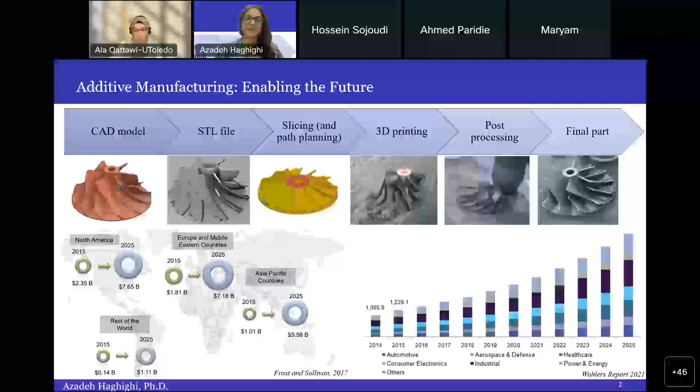Since its emergence in the 1980s, additive manufacturing was mainly used for making prototypes, and it has kind of been changing throughout the years. Especially recently, we have seen this trend that additive manufacturing technology and products are now being used in critical industries like aerospace and defense, and it is with no doubt that ensuring the final quality of these parts is becoming more serious than ever before.

No one wants a jet to drop out of the sky, right? So the technology, in a sense, is still not very mature. There are still issues with the quality of the parts that are being printed. For example, we see frequent voids and pores happening inside the specimens, and these are critical because these are generally the regions where cracks can initiate and propagate eventually.

We have surface roughness issues associated with parts printed with this technology, and then deformations and distortions which can impact the conformance of the parts to their tolerances. These are generally due to the cyclic patterns of heat—heating, cooling, and then shrinkage and expansion cycles that can eventually deform or distort the part.

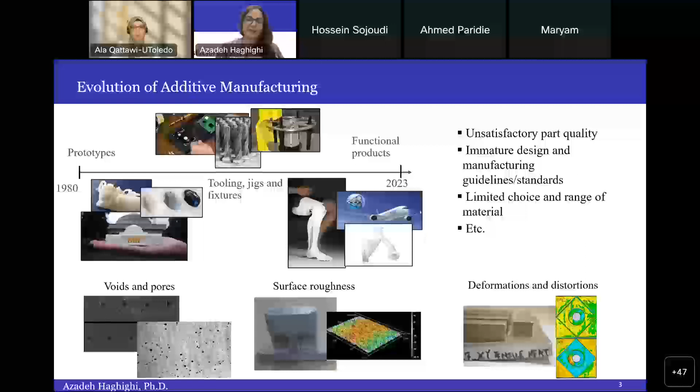So yes, there are a lot of issues, but from a researcher's point of view, this is exciting and good news. We have stuff to really work on to help promote and enhance the technology as it is. Throughout the years, my research group has been working on addressing different aspects of quality in additive manufacturing, ranging from micro levels to macro levels, and from process level to product level.

Today in this talk, I have selected three specific topics ranging from process to product level that our group has worked on. One is on filament bonding and porosity variation modeling. The other is surface roughness modeling, and the third, on the product level, deals with tolerance design and process planning.

As you see, these three topics match the three different quality issues that I mentioned with respect to additive manufacturing. After I talk about these works that we have done, I want to paint the picture for you of what the vision for smart additive manufacturing is, where we're really going.

So when it comes to real-time quality assurance, what is the future of additive manufacturing, what are the challenges ahead, and how our research group is actually trying to address those challenges.

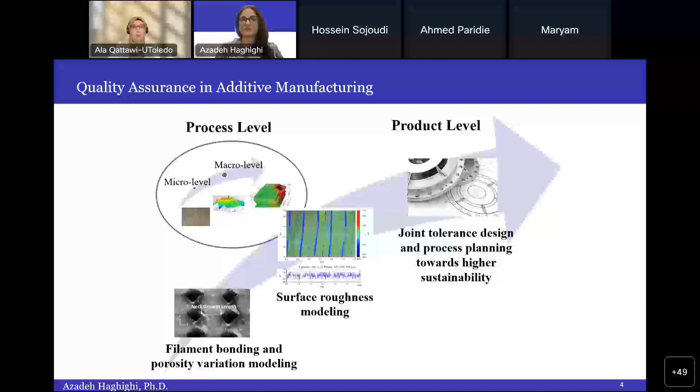With respect to filament bonding and porosity, these are really important factors because they can impact the mechanical properties of the parts. They are not generally desirable to have pores or voids inside the part. There is a lot of work to characterize the bonding and porosity, especially when it comes to extrusion-based additive manufacturing, and also the bonding of layers. Formulating this bonding and porosity is important to understand not only the global properties of parts, like tensile strength, but also the localized properties of parts.

By bonding, I mean basically the extent of two paths being connected to each other. In extrusion-based additive manufacturing, you have two paths being deposited. If they're close enough, they can start forming a bond, which is thermally induced and also induced by surface tension. The bonding specifies how strong the properties would be, but the pores also contribute to the mechanical properties. So understanding the spatial variation of both the bonding extent and the void is important.

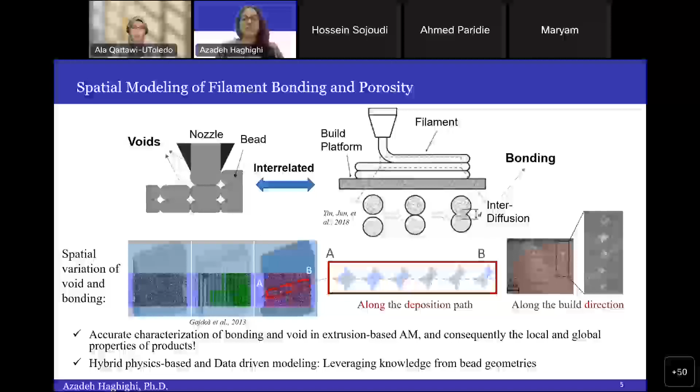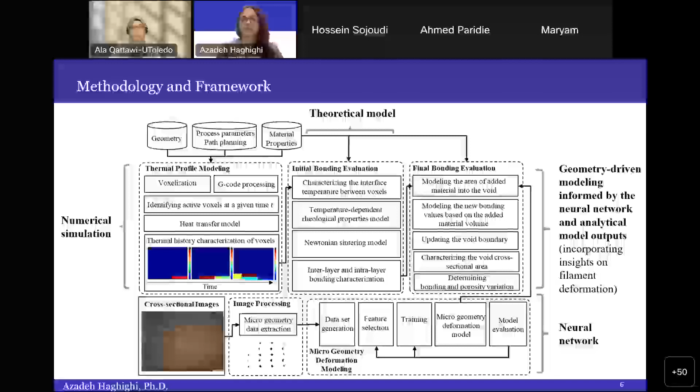However, we decided to look at the cross-sectional images of the printed specimens and extract data related to the microgeometry, to establish a relationship of the prints with the bead geometry deformation, and incorporate that information into the bonding formula from the Newtonian sintering model. Using the law of conservation of mass, we could update the boundaries for the voids and bondings, and come up with a more accurate representation of the spatial variation of these two elements.

This shows a bit more detail of the different steps involved in the methodology. Up to here, it's pretty much standard from the literature. We had this numerical thermal profile, actively updating a temperature, or thermal tensor using MATLAB, actively checking the active neighbors and contact areas to update the temperature. That temperature was then fed into the theoretical model to formulate the bonding.

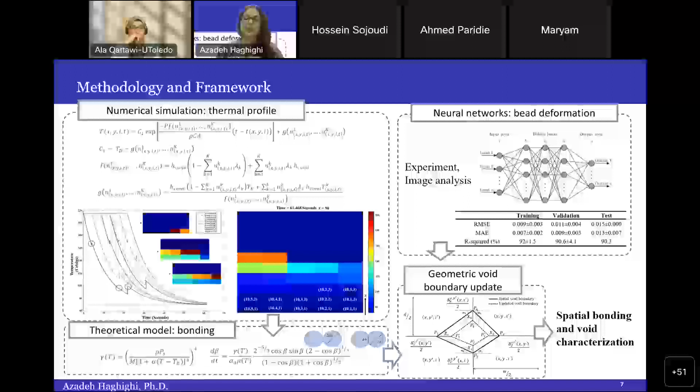And then we had a neural network formulating the bead geometry deformation, and finally a geometric model for the void boundary update, which gave us the updated values for the bonding and void areas.

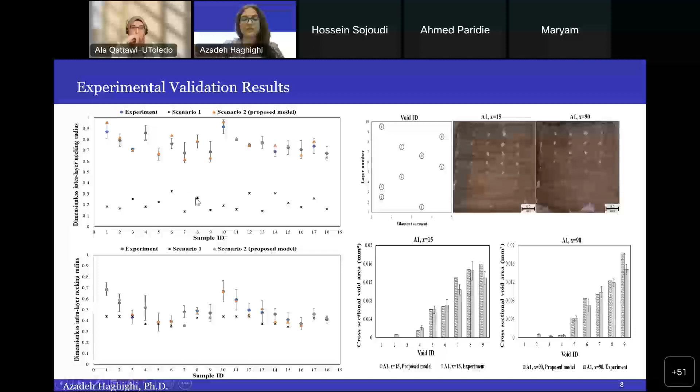This shows the results of this work. We had to compare with experiments, so here the orange ones are our predictions. On the left we have both the dimensionless interlayer and intralayer necking radiuses, representing not just the bonding with adjacent filaments on the same layer, but with the layers on top or the bottom as well.

The blue one is the experiment data, and you can see that the orange one, the proposed method, is very close to the experiment. The black one, scenario one, is the output of the Newtonian sintering model. This is if we didn't incorporate the bead deformation, and you see that we couldn't really capture the actual spatial variation correctly. By incorporating the bead geometry, we could enhance the prediction significantly.

On the right side, this was the necking radius, and here you can see some of our validation results with respect to the void area. We randomly selected some voids, using image analysis to get the area, and then compared it with our proposed model on the bottom. There was pretty much a good match between the two.

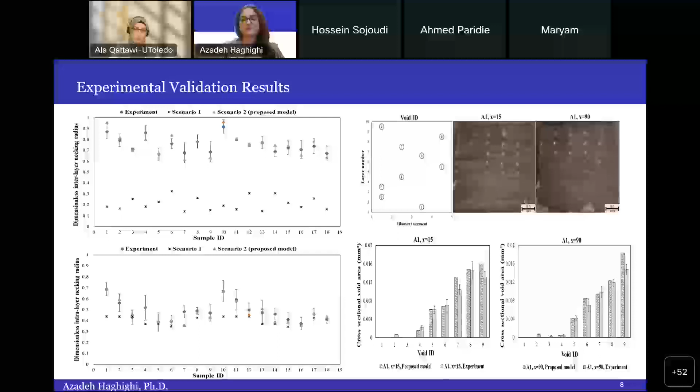So this was on the bonding and pore characterization. Now moving on to surface roughness characterization, we know that surface roughness is an issue in additive manufacturing, and many people use hybrid processes, for example incorporating additive and subtractive like milling together to enhance the surface roughness, and this is a very powerful tool.

One thing that was not really available at the time was any kind of theoretical model for the surface roughness as a result of a hybrid process. This is important because we want to understand the capability of our process, and see how much we can enhance the surface roughness using this hybrid process, and how much CNC milling processing would be enough to achieve the roughness we eventually want. So to address this gap, we came up with this theoretical model for surface roughness modeling.

Similar to the previous study, we wanted to leverage some insights from the actual physics of the process. In the previous one, based on domain knowledge of the process, we knew the bead deformation contributes to this spatial variation, so we wanted to leverage that information.

The same idea here, we wanted to get insights from the process physics. We leveraged the knowledge we had on the staircase effect and how that would create different patterns of surface profiles for the print, as you can see on the middle image. When you have a printed surface, due to the staircase error you have these stairs, and those staircases are contributing to the surface roughness.

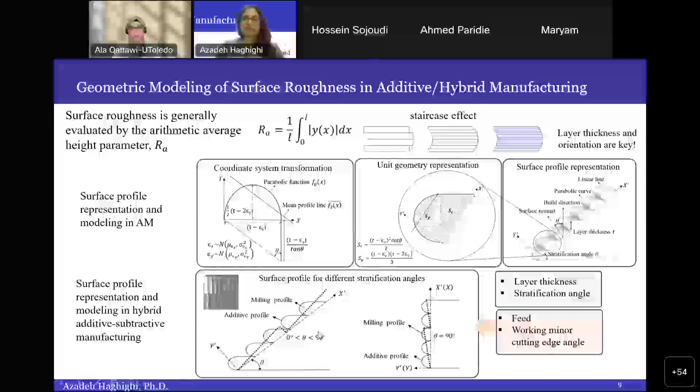Depending on different stratification angles, we had to consider different cases for the mathematical computation. For when the stratification angle was equal to 90 degrees, the bold thick line represents the intersected profile, the function we want to find eventually. Finding this profile can be reduced to finding these intersection points. If you know these intersection points that I've highlighted, you would easily get the function of this intersected profile, because it goes back and forth between the parabolic function and the sawtooth function. That was the problem we were eventually interested in.

Each of these functions we had to convert to periodic functions, so we used Fourier transform to do that, and then eventually intersect them, getting these intersected points solved using an algorithm that we developed. Eventually after that, it was all solved, and we could easily get the surface roughness solved. I don't have the formula here because it was a long one, but you could easily solve it afterwards.

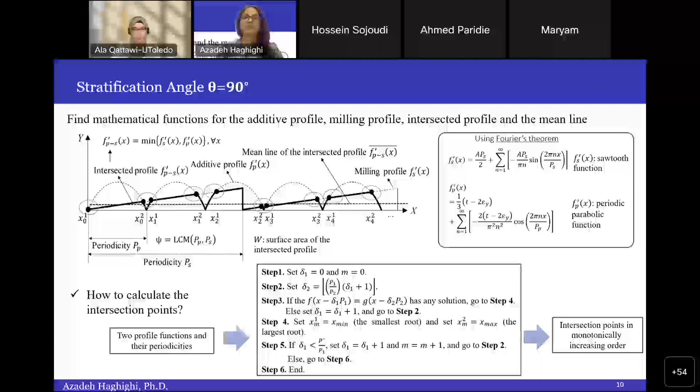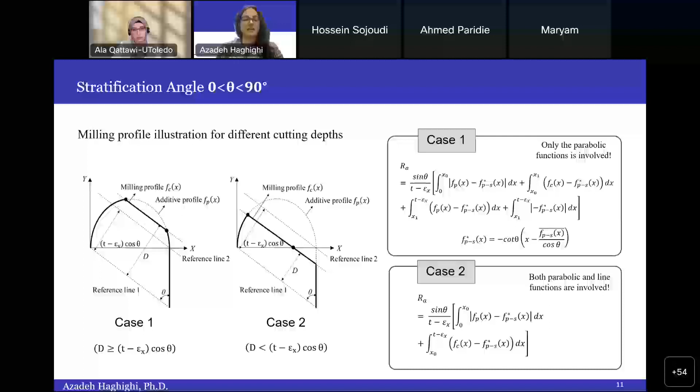For when the stratification angle was between 0 and 90, again we had to split it into two different cases depending on where the milling profile was positioned. If it was here or here, the formulation was slightly different. But the whole idea was still the same: intersecting them, finding the mathematical function of the intersected profile, and getting the surface roughness solved.

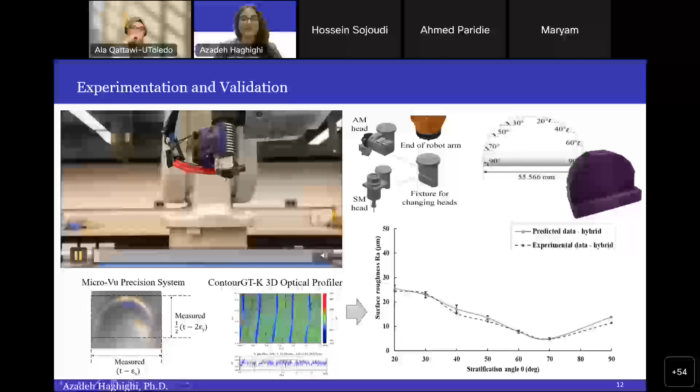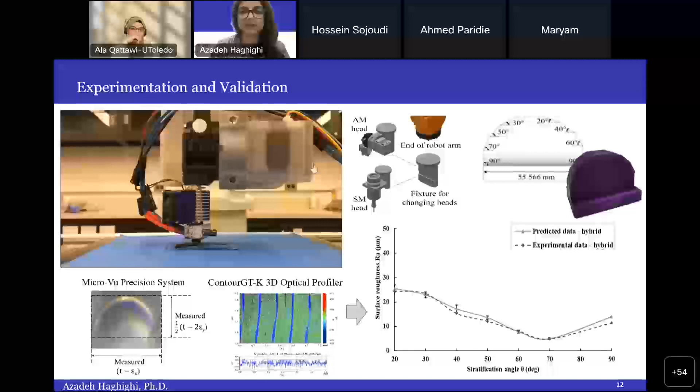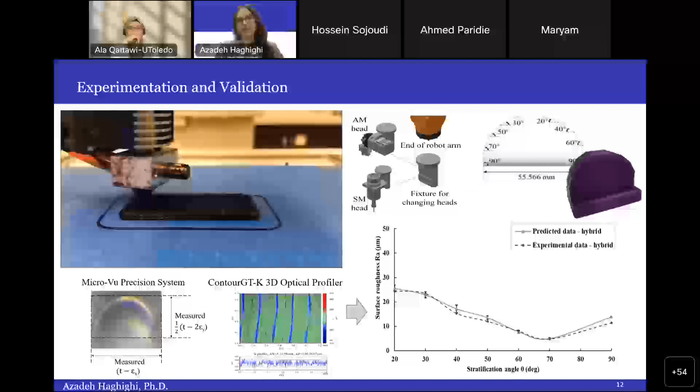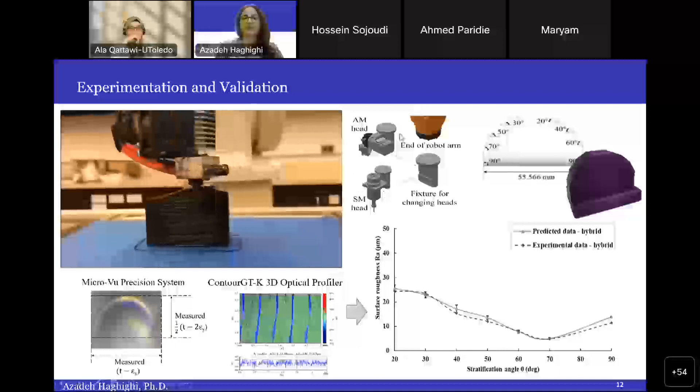So I'll jump to the results quickly. We didn't have a hybrid machine, so we actually developed our own robotic arm for additive-subtractive manufacturing. It required some coding - we had our own MATLAB code and some coordinate transformation to convert the geometries and the G-code from the slicer to the robot coordinate system. The robot was equipped with a subtractive head and an additive manufacturing head that we also developed.

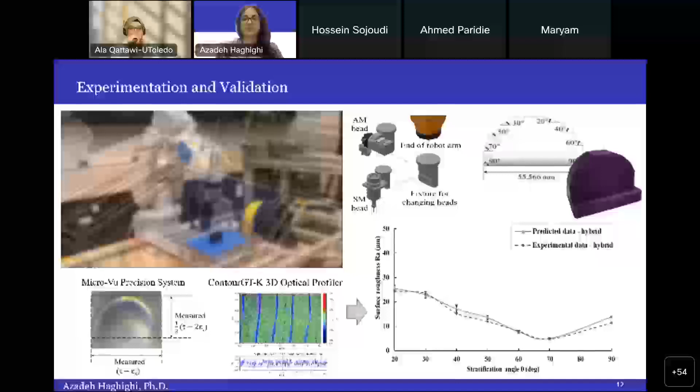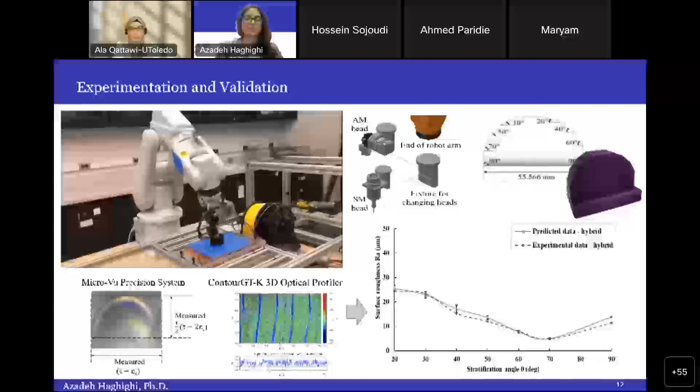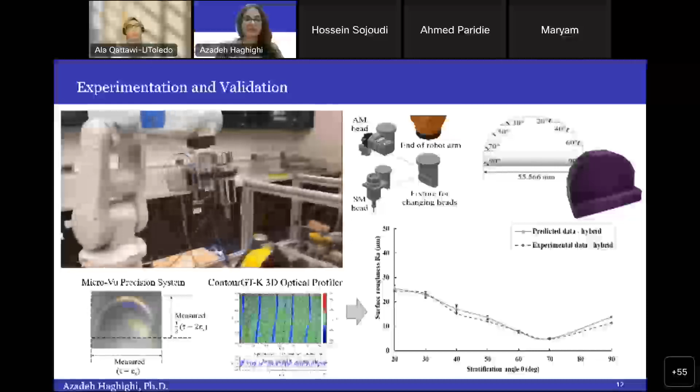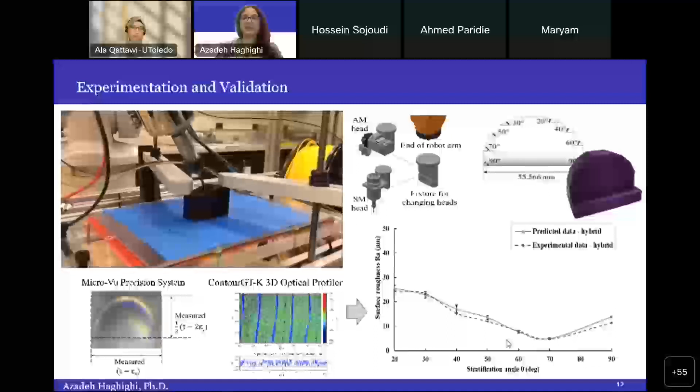We had this geometry that we designed with a range of stratification angles so we could test and validate the accuracy of our proposed approach. Some parameters in our model had to be experimentally fit because they were associated with errors of that specific machine or process - for example, epsilon X and Y, which we extracted from the actual prints under the microscope. We used the optical profiler to get the surface roughness out, and for different stratification angles, our theoretical model showed a close match with the experimental data.

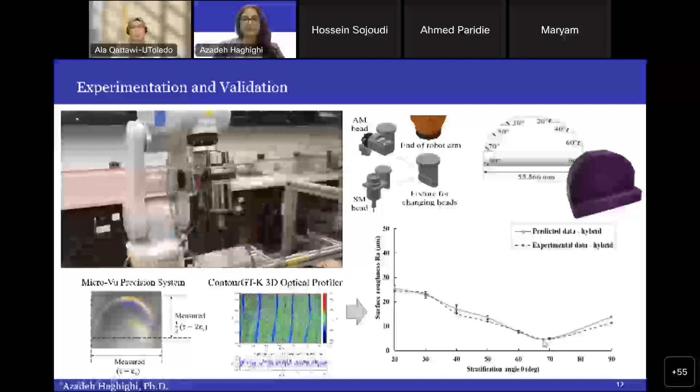So that's the robotic one. Now I want to jump to the product level. This paper, as well as the previous one, were both on the process level, and now I want to go to the product level.

Here we're dealing with different parts and a final product. Sometimes the parts have to be put together, assembled. And I know additive manufacturing has potential for making non-assemblies, but eventually in the real world there might still be some assemblies involved. For that, understanding the consequences at the product level is important, and what type of research can be done at that level.

Traditionally, tolerance design has been used as a powerful tool to minimize not just the defect rate but also the manufacturing cost. The way people traditionally do tolerance design is they come up with cost-tolerance functions that are experimentally fitted, and then use them at the design stage to come up with the right tolerances assigned to different parts. The whole point is to minimize the defect rate of the final part and ensure the final product has the functionality it needs.

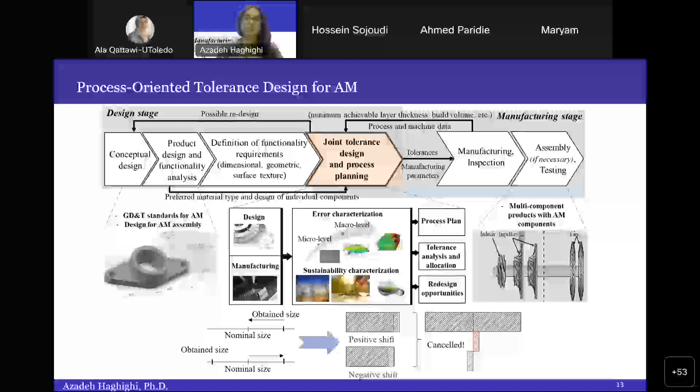In these traditional manufacturing studies, there are certain assumptions when it comes to tolerance design. For example, you need a good understanding of the probability distribution of the errors and variabilities associated with the process. This is something still not fully known for additive manufacturing.

In traditional manufacturing processes, generally based on the central limit theorem, one can assume normal distribution for the error. That's understandable because the scale of production there is mass production - you're fabricating hundreds or thousands of parts. So you can easily assume normality of errors and the calculations still look sound. But those assumptions are not valid for additive manufacturing anymore, because we're not dealing with mass production, we're dealing with mass customization. We're not interested in making thousands of parts, but maybe one, two, three, or a small batch of certain geometries before moving to another set. So it's clear that traditional tolerance design approaches might not be useful anymore, and their assumptions are not valid anymore.

So there should be some way to do tolerance design for additively manufactured parts with consideration of the new circumstances of additive manufacturing.

Traditionally, tolerance design is done separately at the design stage, and then the tolerances are transferred to the manufacturing stage, where the manufacturer decides what process parameters to use, for example just based on experience or some guidelines, to achieve that tolerance. For additive manufacturing, I don't think this is a good approach.

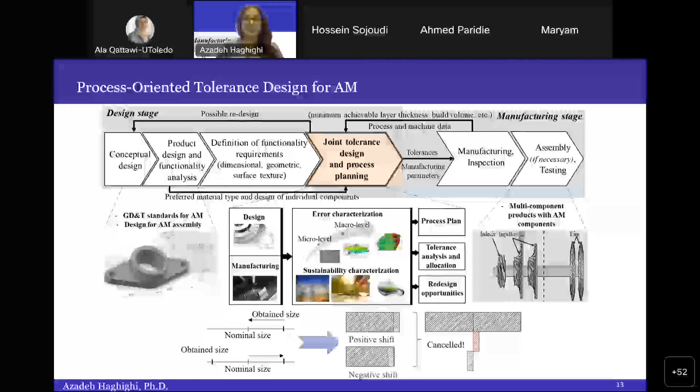And this is still cheaper than going with any type of compensation or other fixes. So it's cheaper, less effort, and we still get the assembly functionality we need. So why not do that? That was the inspiration.

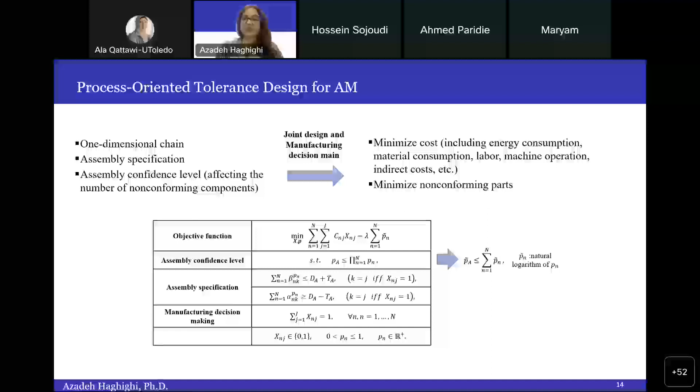So we formulated a one-dimensional assembly chain, the simplest case, starting with a given assembly specification and a required confidence level. The decision variables for us were this matrix X, the assignment matrix.

I want to decide which part should be built with which set of process parameters in additive manufacturing. We also had a vector P, reflecting the confidence level of the components, which was eventually translated into tolerances and the defect rate of the assembly. Then we formulated an optimization model with different constraints with respect to the assembly confidence level, assembly specification, and manufacturing decision making.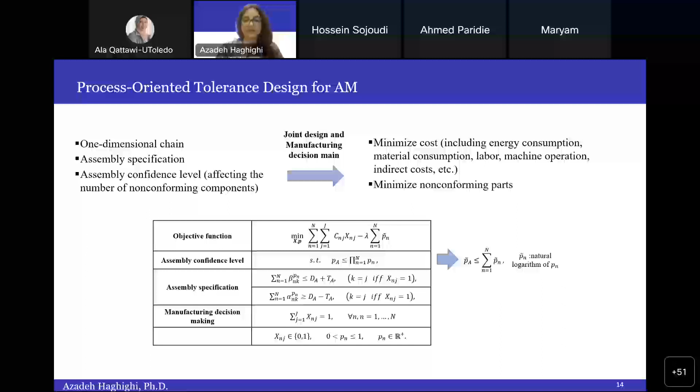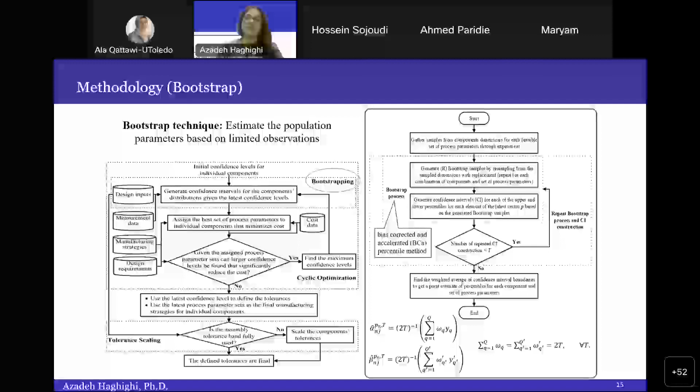We had some nonlinear constraints which we handled by converting them to linear constraints. The methodology we adopted for solving this: first we use bootstrapping, a statistical technique that, when you have limited observations, allows you to estimate population parameters based on those limited observations.

For additive manufacturing, we knew that if we wanted an idea of the error distribution, we couldn't simply assume a normal distribution. We had to estimate this based on limited observations, and that's why we used bootstrapping.

The bootstrapping technique was used to calculate the confidence intervals for each element of the vector P. We repeated that simulation T times and got the weighted arithmetic mean of those values to get the upper and lower bound for the confidence level, and we did that for all the different parts we had.

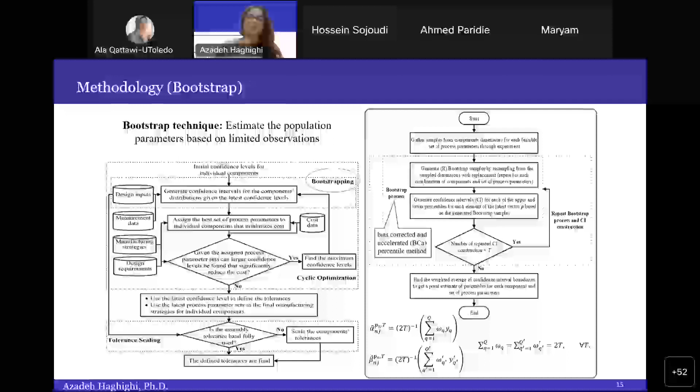We used cyclic optimization to solve the problem because it was a multivariate optimization problem. The way the objective function, constraints, and decision variables were related made it really hard to use any other optimization method, so this was the solution we came up with. In multivariate optimization, you fix one of the decision variables—here we had two decision variables.

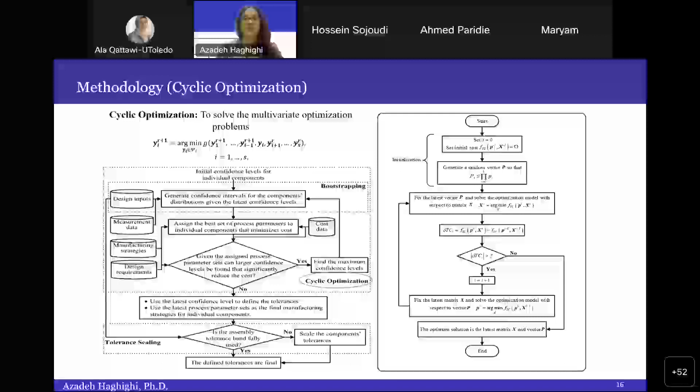So we fix one of them and solve the optimization with respect to the one remaining. Once you have a solution, you fix that one and again solve the optimization with respect to the other one, going back and forth in cycles to converge to the solution you want.

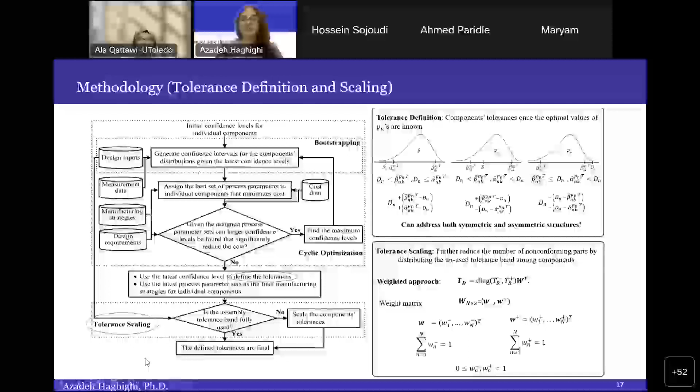The last step was tolerance scaling. We went back to see if there was any unused tolerance band, and if there was, we distributed it among the components to further reduce the number of defect rates at the end. We used a weighted approach to do the distribution.

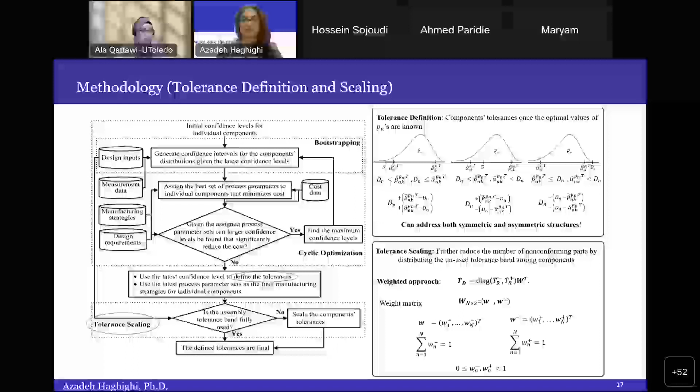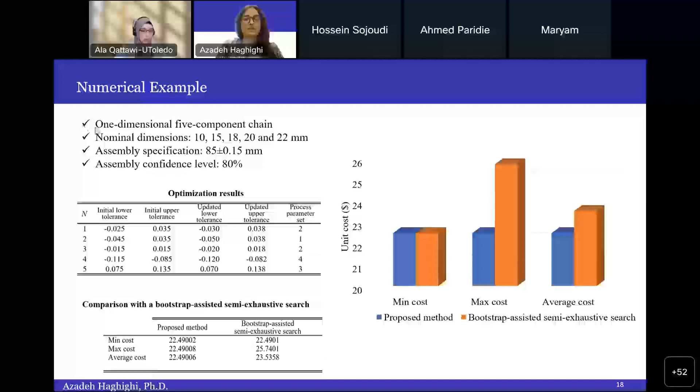This is a simple illustration of the results. As I said, we used a one-dimensional chain with 5 components, printing components with different nominal dimensions that were contributing to the chain of the assembly, and the assembly specification confidence level was given to us.

We used our methodology to find the tolerances for each component plus the additive manufacturing process parameters that should be used for each one individually, not just to achieve the lowest cost possible, but also to achieve the confidence level and assembly specification we wanted.

We even compared our method to a bootstrap-assisted semi-exhaustive search. The blue one here is our method and the orange one is the bootstrap-assisted semi-exhaustive search. You can see that the unit cost for the assembly with our approach—the minimum, max, average—is always consistent, whereas with the other one you need to do an exhaustive search and still couldn't really achieve that well.

In terms of computation cost, our method was still faster than the exhaustive search. This was the first step towards doing tolerance design with additive manufacturing using a smaller amount of data points, and also how to do tolerance design jointly with manufacturing decision making, rather than separately as was traditionally done.

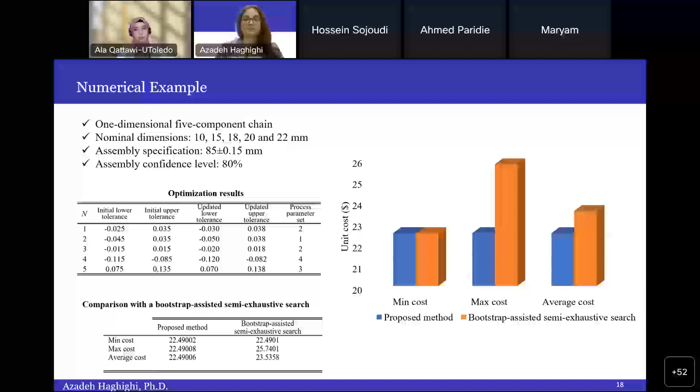All these methods I talked about had some components that were model-based and some that were data-driven. Model-based generally means you have optimization models, numerical models, anything that comes from domain knowledge or physics of the process, or a theory—we call it model-based. Model-based approaches are generally interpretable and reliable.

With respect to capturing stochastic behavior, model-based approaches are not as good as data-driven approaches—they're generally more on the deterministic side. Because of that, they generally give us lower accuracy, since you have to make a lot of simplifications and assumptions with model-based approaches.

Data-driven approaches, on the other hand, can do magic—especially with a good amount of data to fit them, they can get very accurate results. However, they have this reliance on large data sets, which is costly and complicated, especially for additive manufacturing, where data acquisition, gathering, and pre-processing are very time consuming and costly. Training data-driven approaches is also costly, and eventually you end up with a black box that's hard to interpret.

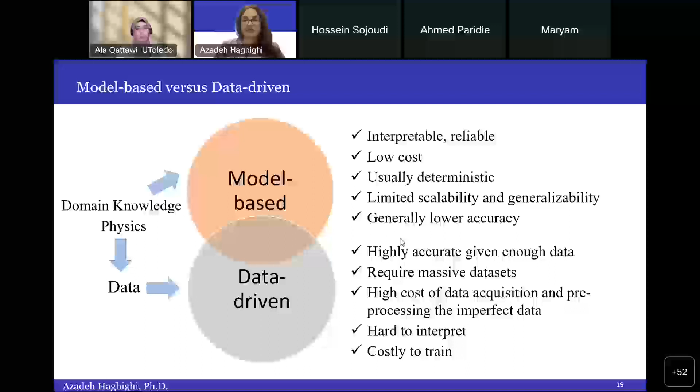Let me give an example with respect to thermal signature and melt-pool modeling in additive manufacturing. There are researchers using analytical or simulation models to extract thermal signature or thermal behavior in additive manufacturing—really useful studies. However, they're generally limited to very simple geometries, hard to generalize to more complex scenarios, and also very time consuming.

On the other hand, those that rely on data-driven approaches for thermal signature or melt-pool modeling have to deal a lot with data acquisition and pre-processing—still very time consuming—and the resulting model, as I said, ends up not as interpretable as the physical models.

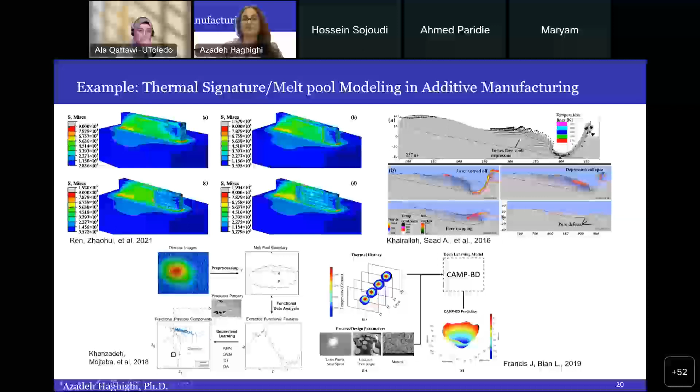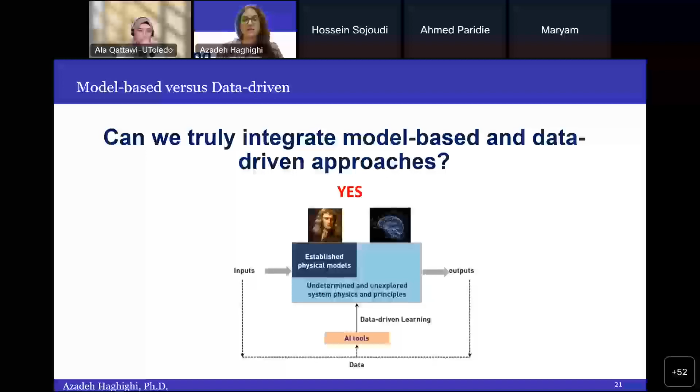So the question that has recently been emerging in the literature is: can we truly integrate model-based and data-driven approaches? And the answer to that is actually yes. We see that many researchers are looking at the sweet spot between model-based and data-driven approaches, which is in the center, in the middle of those two circles I mentioned.

This has been done in the literature for many years. The way they do it, I call it hybrid methods. For example, they have physics and domain knowledge data, and they try to incorporate this knowledge into data-driven methods like neural networks. They basically get the output of the physical model and put it as the input of the neural network, and vice versa. So it's more like a sequence-based solving and inference of the problem rather than really fusing the two together.

Of course, this is most common in the literature, but in terms of fusion and interpretability it's less effective. So we see that since 2020, or 2019, and the rise of PINNs, physics-informed neural networks, the manufacturing community is now trying to evolve together with that, bringing that knowledge of PINNs into the additive manufacturing community to make the learning and inferences physics informed.

So you see that we're evolving or moving towards physics-informed learning and inference, where the physics and domain knowledge are going to be infused into the neural network architecture and parameters. Either by manipulating or changing the activation function or loss function, or even the design of the architecture of the neural network, which corresponds to the physical model. You want to fuse that knowledge into the data-driven method.

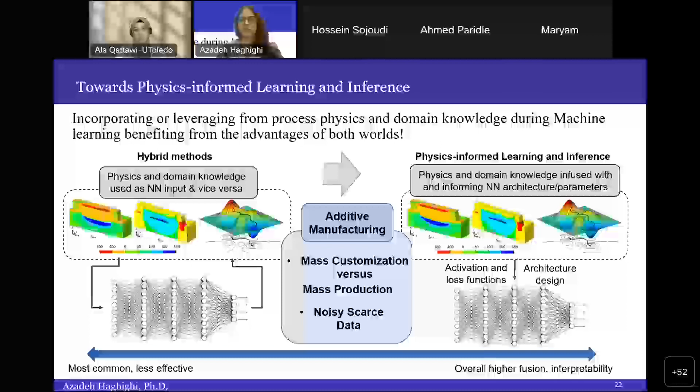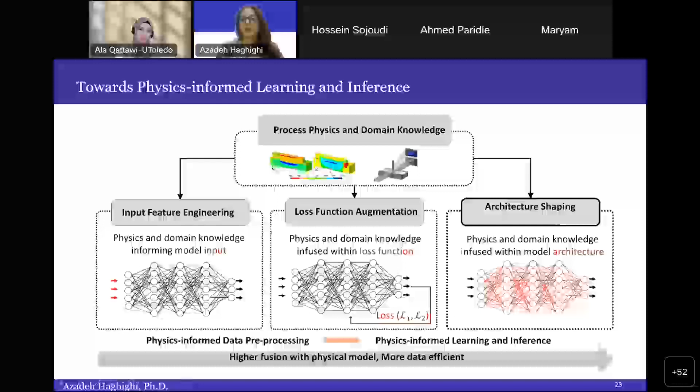So the three different methodologies that are more common in the literature—two of them, on the left, are input feature engineering and loss function augmentation. This loss function augmentation is what PINNs are using in the literature; they call them PINNs, but they're made based on the loss function augmentation. Another one is architecture shaping, which is what our group is trying to do. We try to see how we can infuse the process physics into the architecture of the neural network to make it more interpretable as well.

So the idea that we're leveraging in our methodology is a deep unfolding idea. The neural network we're building—we call this solution architecture-driven physics-informed deep learning, or APIDL—relies on the deep unfolding methodology.

So this methodology says that if you have an iterative algorithm or optimization model, or anything that is iterative, and it can be iteration with respect to anything—temperature, time, optimization cycles. The iterations could even reflect different states of the design, or the layers of 3D printing, anything. So anything that is in an iterative form.

If you have such a model that can map the transition between iteration at k-1 and iteration at k, if you have this mapping function, this function of course should be nonlinear, because if it's linear, you don't need neural networks to solve it. So it has to be nonlinear in some form.

Then what you can do is unfold each of these iterations into one layer of the neural network. The weights and biases of the neural network you can attach to the coefficients of your physical model. So when you're training your neural network, you're solving for these weights and biases—it's like solving for the coefficients. So the weights and biases give you information about the coefficients of the model, and that's why they become much more interpretable. It's not a black box anymore.

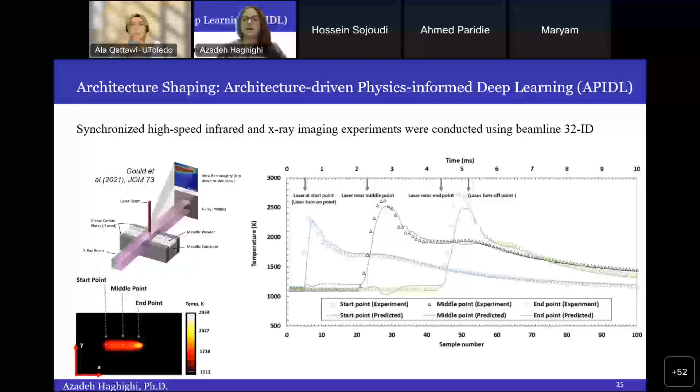So I'm going to compare it to other data-driven approaches for you to see how our method actually performs. For example, we compare the APIDL with the artificial neural network. So if we use the same data points with artificial neural networks or regular deep learning, and then we use the LSTM, of course, which is very good for time series analysis, and the SVR and ETR also.

SVR specifically is very good for when you have limited data. They have proven to be very good models that can handle limited data. So you see that our model still came up with less error despite the very small size of the training data set. The error was significantly low, and in terms of computation time, somehow in the middle. So not the best, but not the worst, but it's still manageable. It's just a matter of seconds.

But again, the main argument about APIDL is that it's very good when you have limited data, right? So we wanted to test how data efficient the APIDL model is.

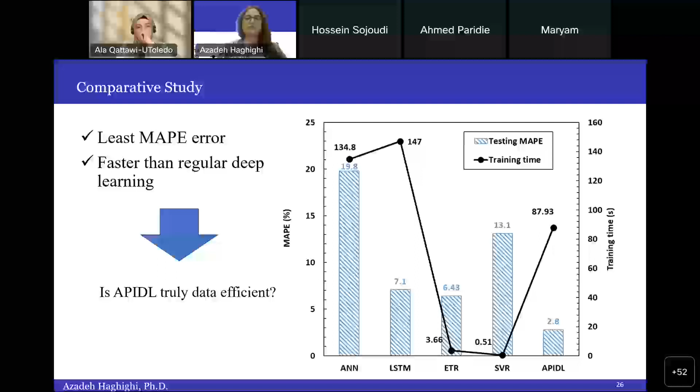So what we did is we kept reducing the number of training data. I'm sure people working with thermal modeling and additive manufacturing know that having 100, 200, 300 data points for training is not much, right? So we actually reduced it really low, until 200 data points only for training. This is a very limited or scarce data region that is not really common in the literature at all. In literature, they're generally above a few thousand or even million data points.

So yeah, with that, I'm done. I just want to acknowledge the SmartShare Lab, my students that made this research possible, and all our collaborators. I'm happy to answer any questions. Thank you so much.

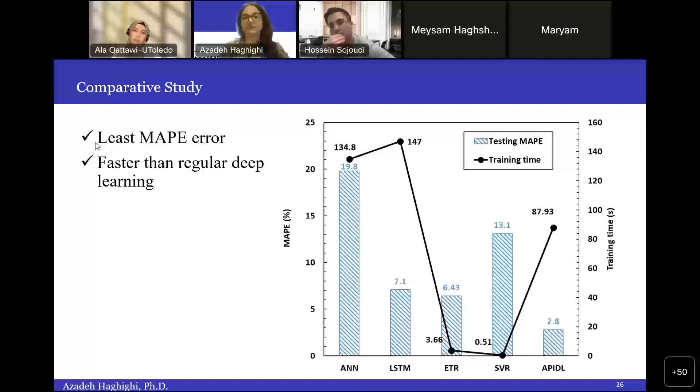But you see, first of all, with this APIDL model we're proposing, this is an innovative way of bringing the physical model into the neural network architecture. We initiated this research by seeing whether the claims about this APIDL—that it can work really well with limited data scenarios—whether that claim holds or not. So we wanted to test with some other data-driven approaches first.

So the next step, as you said, we want to go into more complex cases—we want to compare APIDL with other physics-informed approaches. We can have the same neural network based on loss function modification, and then compare it with the APIDL to see which performs better. Or you might have a set or group of models together, and then compare that to the APIDL.

The idea is that the hypothesis is that it can perform well because of the way the architecture is shaped and it's sparse. It has potential to do very well for limited data scenarios. Compared with other advanced techniques like GANs, we suspect it will do better because GANs have two different networks: one that generates outputs and a discriminator that figures out whether the output is good, and that has to go into another network for training. So you deal with two networks, whereas for this approach you only have one network. We still suspect compared to methods like GANs, this has potential to do better, especially in the limited data region.

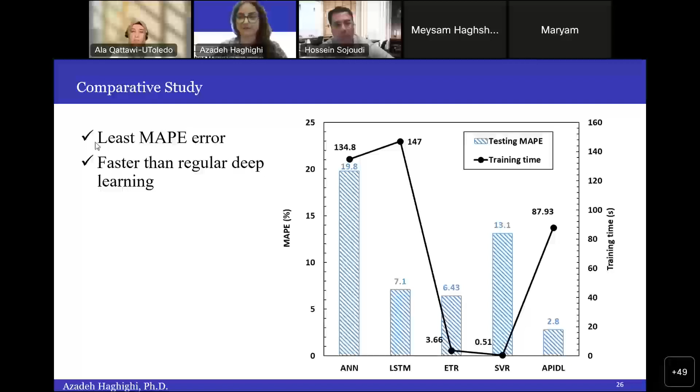Thank you, and I think it's a follow-up question. Why are the hidden layers, or what are the hidden layers doing in the neural network? How do you form them in the data-driven model?

So this hidden layer—let's say you have a model that is iterative. You start with iteration 1, iteration 2, iteration 3, up to iteration 100, for example. You can map each of those iterations to one layer. So all the hidden layers are basically the iterations of your model—iteration 2, 3, 4, 5, 6, and so on. Depending on the iterations you have, you build the architecture with different layers, each reflecting one of those iterations.

Thank you, and I have a follow-up question. Sure. For the data-driven models, basically they depend on experimental identification of the input and output of the process, right? And since we may have multiple processes, multiple machines, and multiple materials, all of them can have different input and different output. But maybe it's a question for future work: how do you see federated learning coming into the data-driven models? Is it something worth investigating, especially if you have data from different sources, different manufacturers, different machines—merging them in your model to predict the output for each one?

Can I ask one last quick question? Of course, go ahead. Again, thank you for the nice talk. I saw in one of your sponsors, you have NIST listed. You are working with NIST on a different project on fatigue. My question is, what would be the interest of NIST on this, since NIST is toward standardization?

Right, so that project I'm working on with NIST isn't directly related to this, but we have been targeting NIST. They had a call about a year ago on additive manufacturing, and we submitted, but it was very competitive. We are pursuing this physics-informed, architecture-driven deep learning methodology, and I think they are very interested. However, I think the idea of physics-informed learning is now kind of saturated, meaning everyone is using it. I was actually talking to one of the program directors, and he said if he gets one more proposal with physics-informed, he's going to be so mad. So everyone is trying to leverage it, which is good because everyone is excited about it. But how we separate ourselves from the pool of all these people, bringing something that is very innovative, I think that would be very interesting.

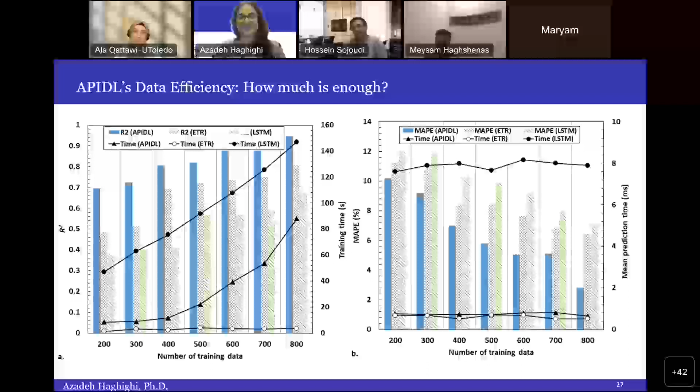Thank you very much. I don't know, Azadeh, you say physics-informed—does the current NSF future manufacturing call need physics models? Right, so still there's a place for it. Yes, it's exciting, there's room for everyone to collaborate and do research on this topic. But again, everyone is trying to have a spot there.